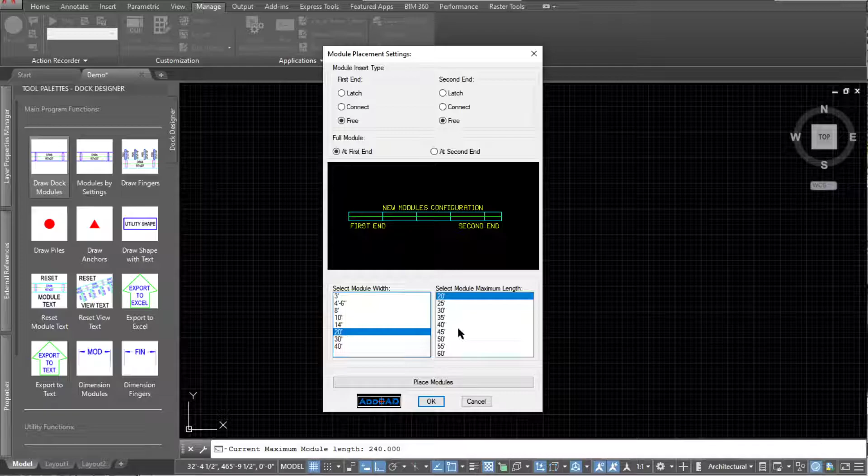To get started, I'll draw some dock modules. This is the interface that allows me to see the configuration of the modules as they're placed. So at the first end I want to be free, the second end I want to be free, and a full module at the first end. 20 feet wide by 40 feet long, place modules. Pick a point, and I want 11 modules, so that'll be 440 feet.

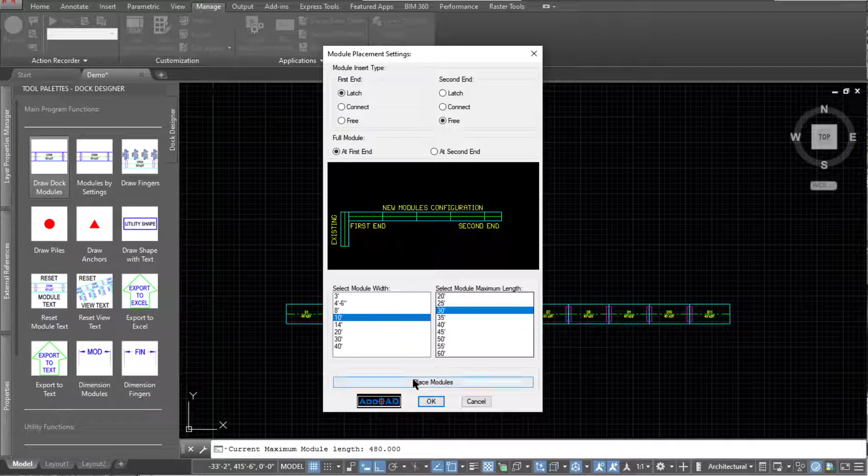And there we have 11 modules. Now I want to place some smaller modules along this left-hand end. So I'll activate that same command, and this time I want to latch onto the end of the existing. Second end can still be free, full module at the first end is fine. And we'll do 10 feet wide modules by 30 feet long. Place modules. Now I need to latch onto the center line of this module, and I'm going to place 5 modules at 30 feet. That's 150 plus 10 for half of this, so 160 feet.

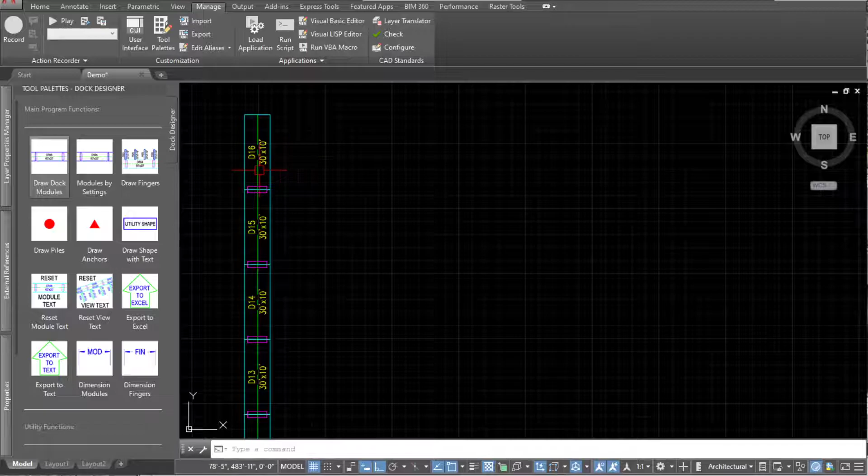Okay, so now we have 30 by 10 modules, and I'm going to place the same at the other end. I can use the same settings that I had before, so I'll place modules by settings. Pick the point, go 160 feet, and then we have those modules.

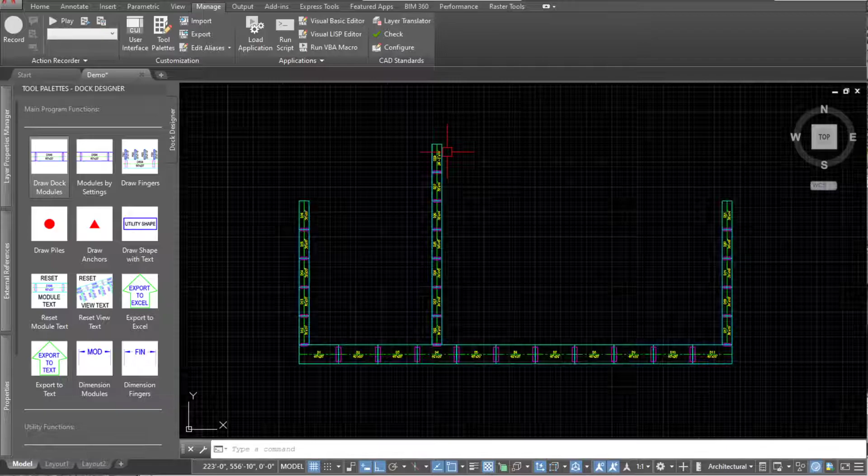Now I'll place some connected to the middle area. This time I want to change the settings, so I want to connect this time on the first end, anywhere along this module. And we'll still stick with 10 feet by 30 feet, place modules. And I'll go the middle point here. I'll just pick a point out here, and the last module won't be 30 feet, but that's fine, it's 29 foot 2.

So, okay, I'll place another series of modules connected to the midpoint of this one. So I can use the same settings. And I'll pick the midpoint, and I'll pick the end point of this to match it up. Okay, so now we have a series of modules that we can add fingers to.

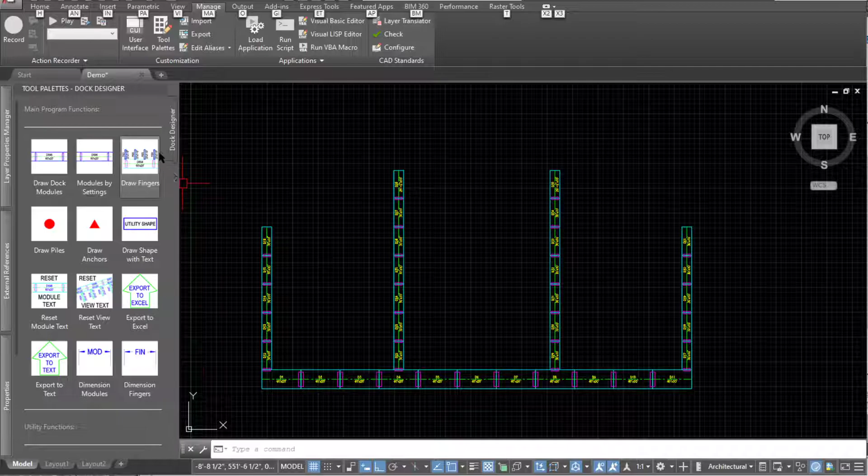And now I'm going to place some fingers down the left-hand edge of this column of modules. Okay, I'll enter the finger width at 2 foot 10, that's fine. 28 feet long, maybe 24 foot spacing, and I'll leave the finger quantity at 10 for now. But I'll pick the first endpoint and the second endpoint, and I'll pick the finger direction while I'm there.

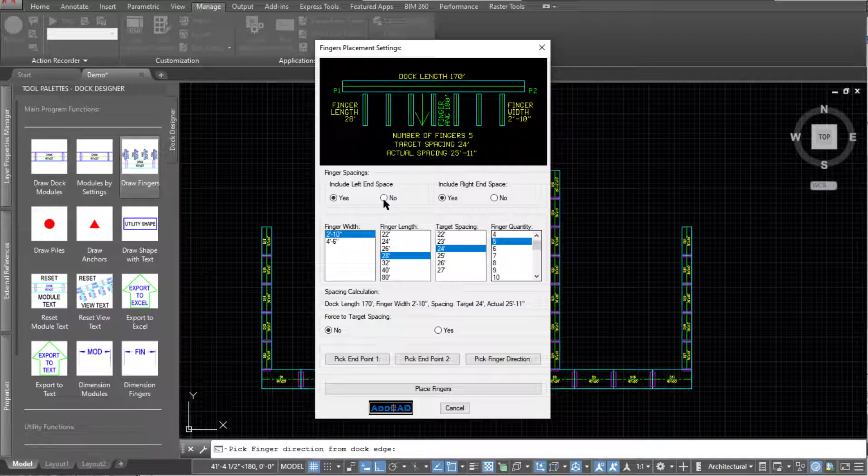Now I have all the data I need to place the fingers, except that the actual spacing is way smaller than the target spacing, so I'll need to change that by reducing the finger quantity. I'll try 7, I'll try 6, getting closer, and 5. 5's plenty, but I've also realized that I want these end fingers to be on the end of the module, so I don't need this spacing here. So I'll remove the left end space, and I'll remove the right end space, and now all our numbers have changed. So I need to increase the number of fingers, and we're still getting closer.

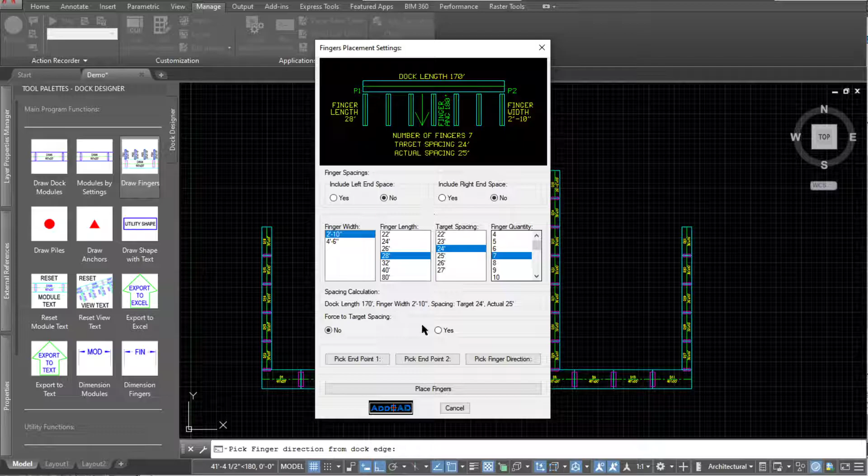25 feet is probably ideal as a target spacing at 24 feet. So I will place the fingers. And then we have our 1, 2, 3, 4, 5, 6, 7 fingers on that left-hand edge.

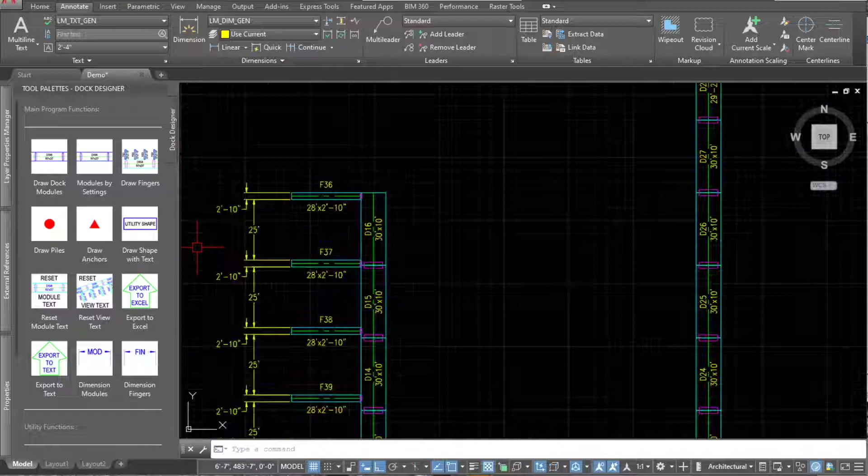Just to verify everything's okay, I'll put some dimensions down these fingers. I zoom in a little. 2 foot 10, which is the finger width, that's fine, and 25 foot spacing all the way down. Well, they fit in pretty well.

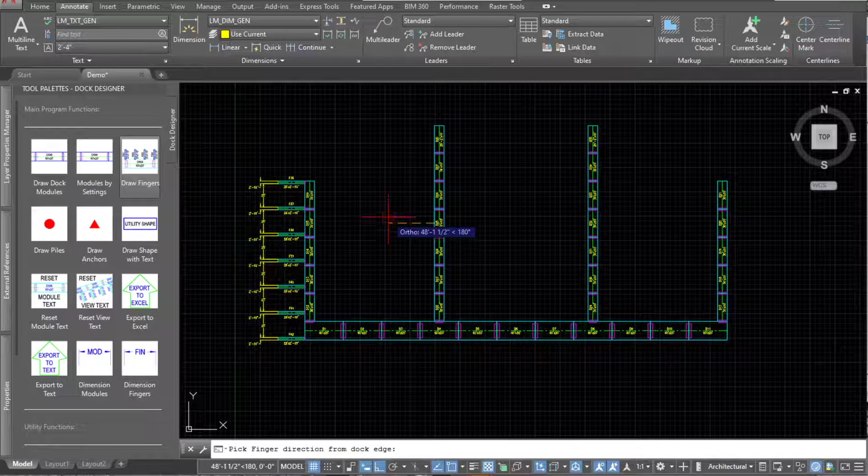And now I'll put some fingers down the left side of this column of modules. So same interface, and finger width will keep the same. Go a little bit shorter on the finger length, and perhaps leave the target spacing at 22 feet, and we'll stick with 10 for now. So I'll pick the first endpoint and the second endpoint and the finger direction. Okay, so now we have our data again.

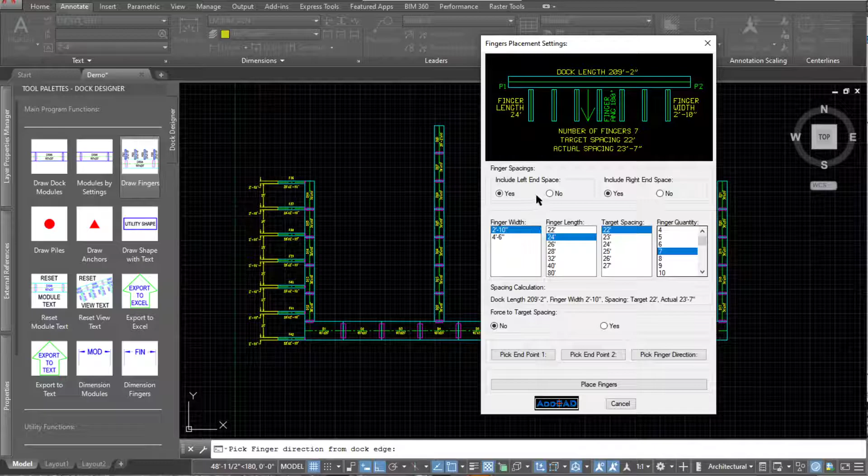That's actual spacing is 16 foot 5 with 10, so we'll try 9, 18 foot 4, 20 foot 8, 7, but we've got this end spacing again, and this time I want an end finger at the end of this module, but I don't want one here, I want the space here. So this is the right end as we pick the points, so I'll leave that space, and I'm going to exclude the left end space. Okay, so now our spacing is at 27 feet because we've got an extra bay, so to speak.

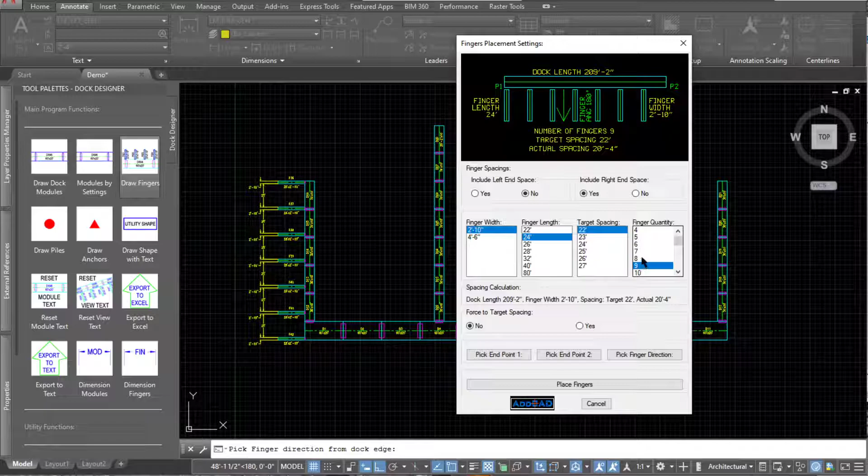So we can go up to 8 fingers at 23 foot 3. That's probably pretty good because 9's going to be less, yeah. So 23 foot 3, and I'll place the fingers.

And there we go. Check them with dimension again. Don't really need to do this, it's just a handy feature. 2 foot 10 and 23 foot 4. So that would be our spacings for those fingers.

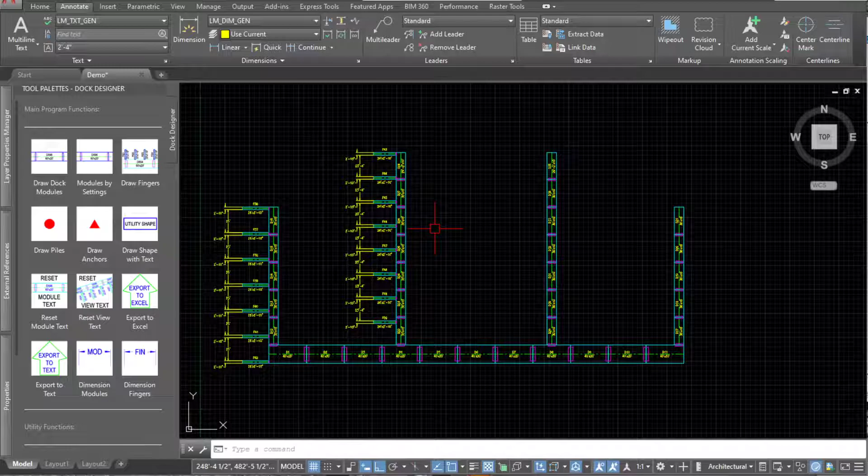Now I'm going to place some modules and attach them to the bottom row of modules. I want to connect them, and I want them to be 20 feet by 40 feet, just to match the existing. I'll pick here, and maybe a bit further down.

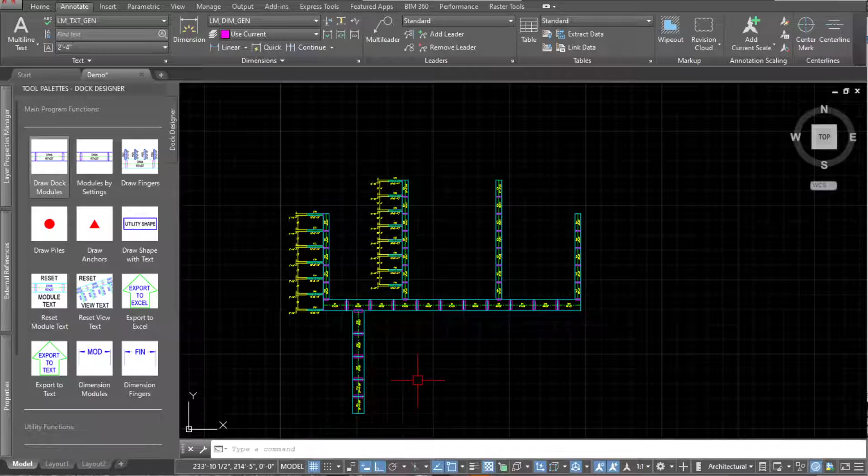So I now have an area where I want to place some fingers, which is this area right here. I'll draw fingers, making them a bit larger than normal—maybe 40 feet long, the extra finger width, and spacing maybe 26 feet. I'll leave the quantity at 10 for now.

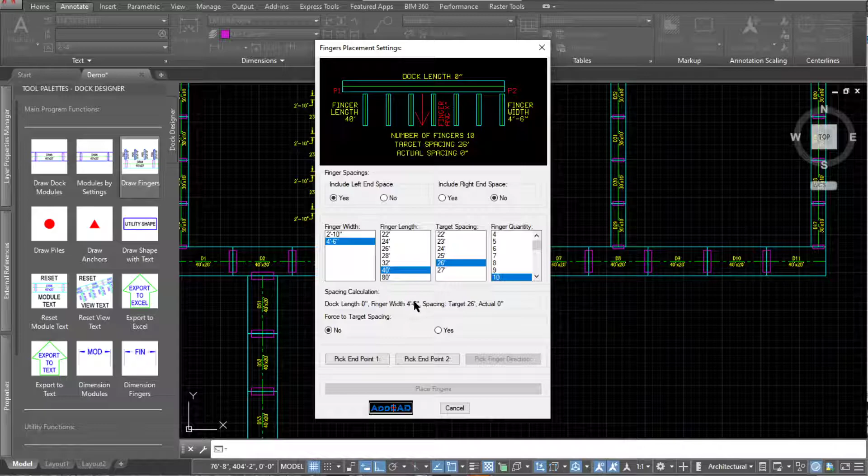In this area on the left, I want a space, but at this end I don't want a space, so I'll get rid of this spacing at the end. Now I'll pick the end point, the second end point, and the finger direction.

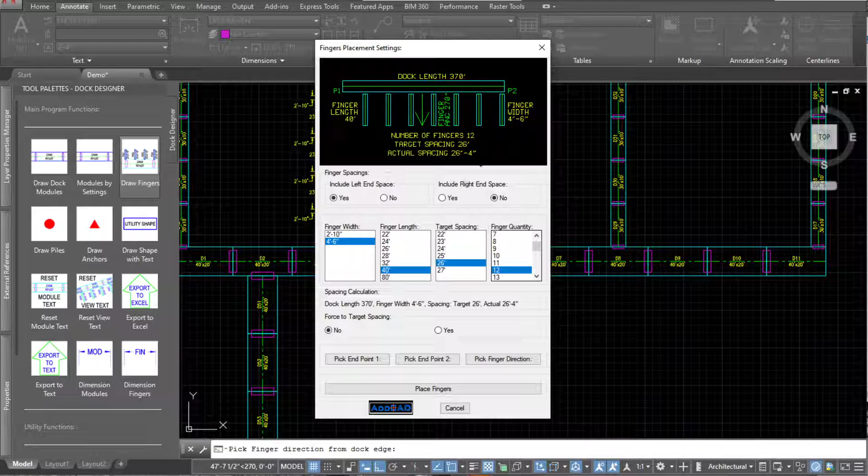Okay, now I've got the data to work with, and I can see that the actual spacing is a bit more than we want at 26 feet for 10 units. So I'll try 11 - 29 foot 1, 12 - 26 foot 4. Now that's pretty much perfect, so I'll place the fingers.

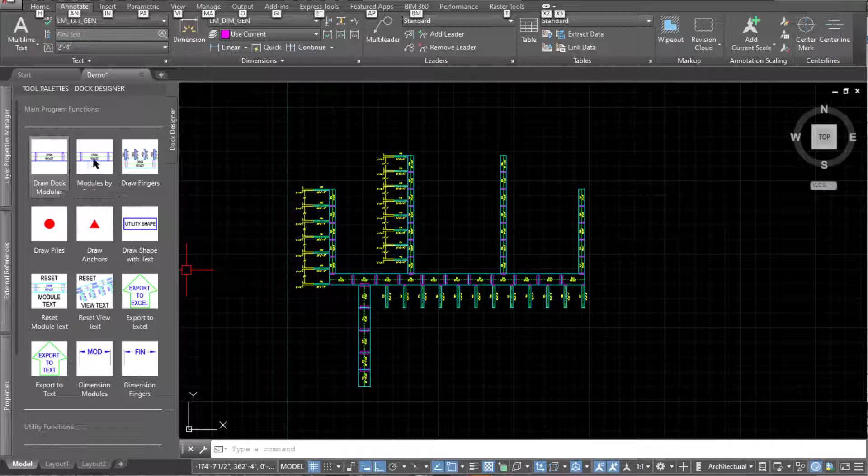And then we have slightly larger fingers on this inner end of the marina. Now I'll place some similar fingers down the left hand edge of this column of modules—4 foot 6 wide, 40 feet.

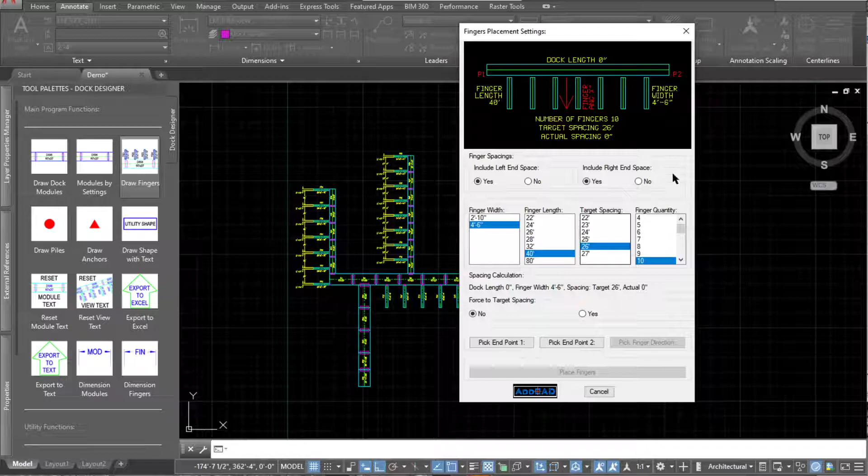26 foot spacing, I'll leave that at 10 for now. This time the left hand edge of it is going to require space, but not the right hand edge, so we'll take that out and pick the points.

Zoom in a bit to make it easier. Pick the second point, and the finger direction.

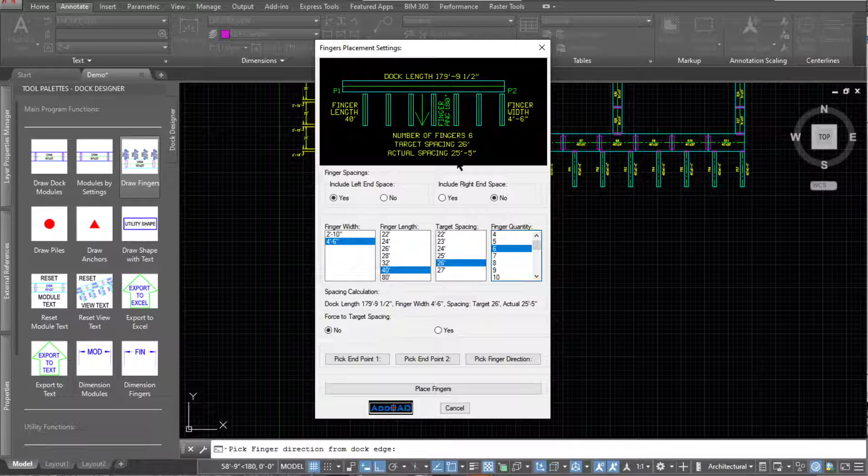Okay, I'm not quite ready to place yet because the spacing is off—actual spacing is 13 foot 5, so I'll need to reduce the number of fingers. 8, 7, 6—6 is looking pretty good at 25 foot 5 versus 26 feet. So I'll place the fingers, and there we go.

So now I'll continue placing fingers around these remaining modules, and we'll look at the bill of materials. Before I extract the bill of materials, what I'm going to do is place some piles and anchors.

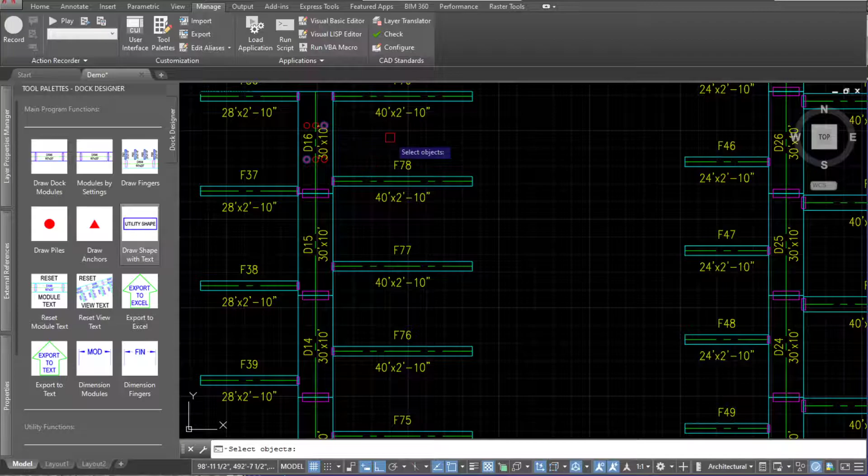I'll place some piles first, selecting a module by its center line, then selecting the pile locations I'd like. These are optimized, so they're in the ideal locations. We have a couple of piles at the end of there, and why don't I add some anchors to maybe this one—the locations are shown, so I'll just add those two.

Let's add some more anchors a bit further along, and I'll add another 2.

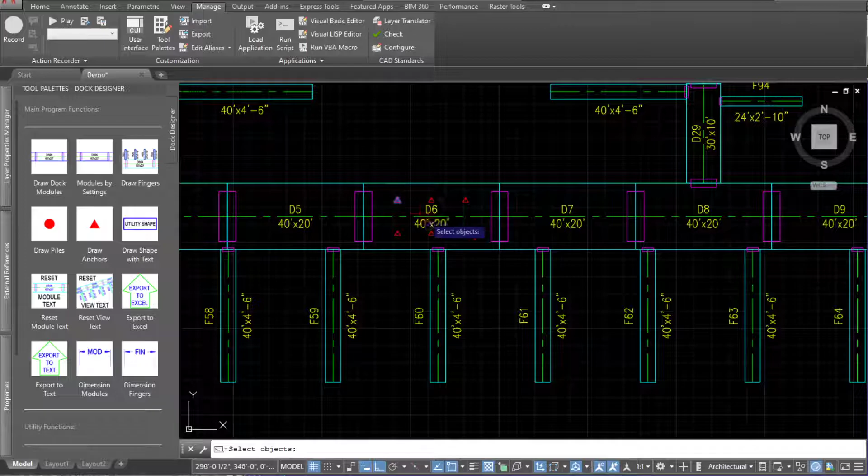And then I'll add some more piles, perhaps down on this module, and maybe on one of these early ones.

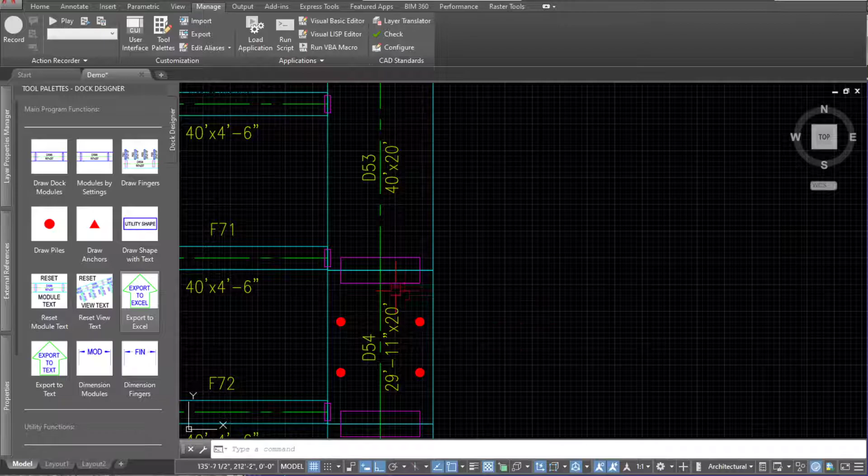These are most likely not the kind of locations a designer would actually place them, but it's just for showing what comes up in the bill of materials for now. I'll place a couple more anchors, maybe this one and this one. Okay, that should do for now.

And now I'll extract a bill of materials to Excel.

Okay, there are 5 sheets. There's a module sheet, and all the modules are identified down the left here as a D for a dock type module or an F for a finger type module, and they're all listed in there. I've just put a cost in at $10, which obviously isn't the real cost, but it's just for demonstration purposes—module length, module width, module square feet, cost per square foot, and module cost. So they're all calculated out, and you can add totals at the bottom or whatever.

Then for the connections, these are identified just by number right now, and they have a connection length and width, the connection area, and again a demo cost per linear foot. All the connections are listed in here.

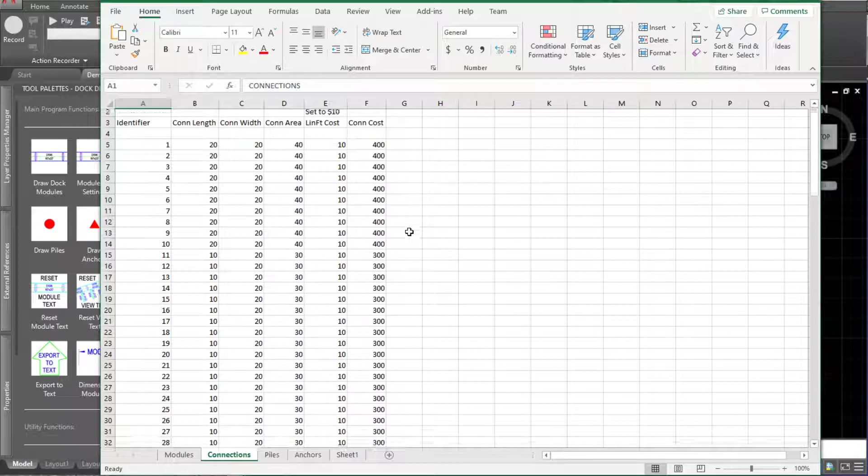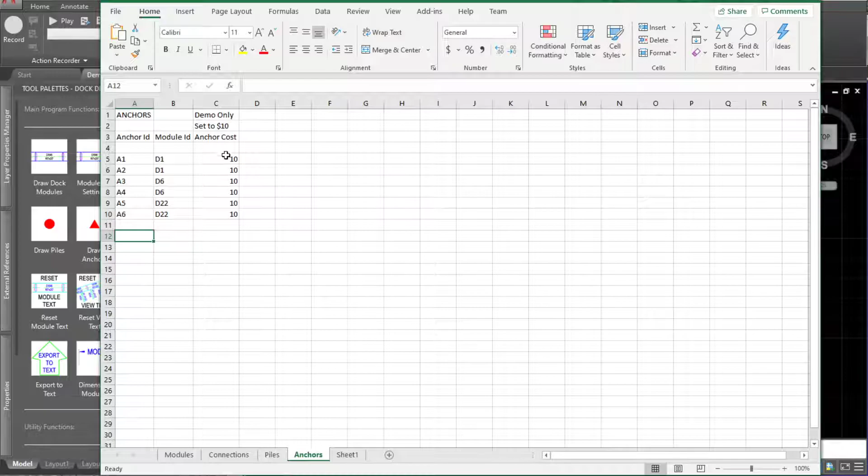And then piles—you saw me just add the piles, identified by pile number 1 through 8 there, which modules they're located on, and a demo cost. And then anchors, the same thing: anchor IDs, module IDs, so the modules they're located on, and a fake cost right now, and then there's a sheet 1.

Okay, so that basically is how to extract a bill of materials. You can do a very quick list by feeding it out to Notepad, and there's the same information, but that's just if you wanted to print it out or something.